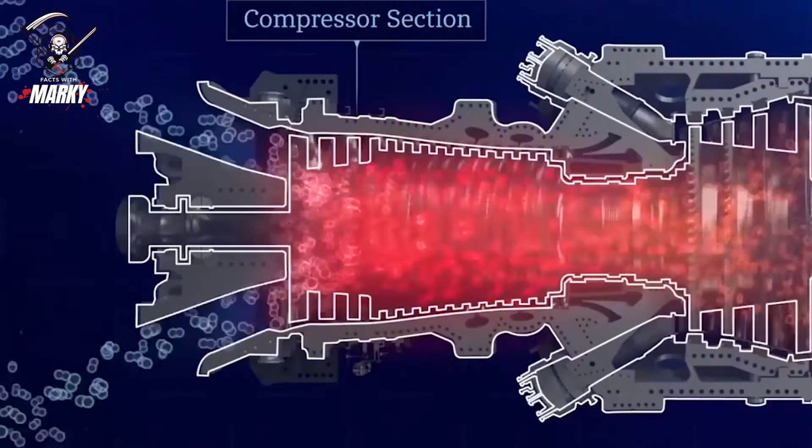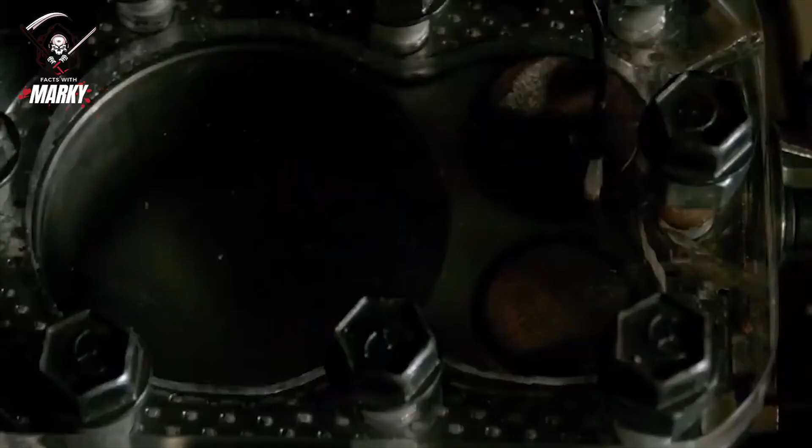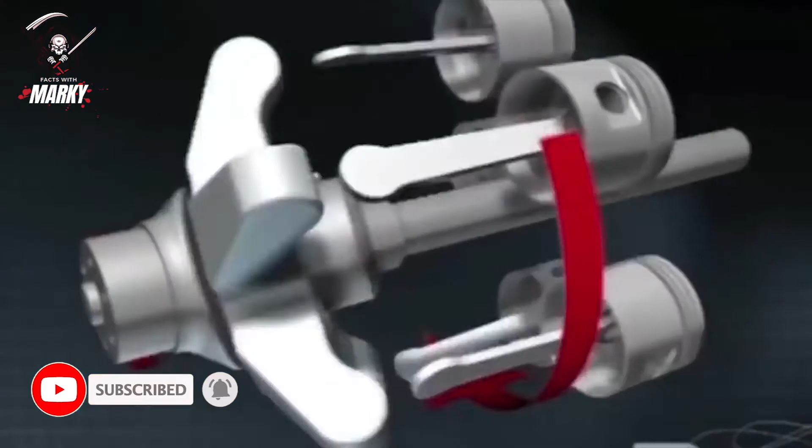Technology has come a long way since John Barber invented the world's first gas turbine back in 1791. Three years later, Thomas Mead refined Barber's idea and came up with the world's first gas engine. That same year, Robert Street introduced the concept of using liquid fuel, creating what we now recognize as the internal combustion engine. The same basic principles are still used in motor vehicles today, but amazing minds all over the world have introduced incredible ways of combining fuels and mechanical parts to bring us truly wondrous creations.

In this video, we're celebrating the strangest and most incredible engines in history.

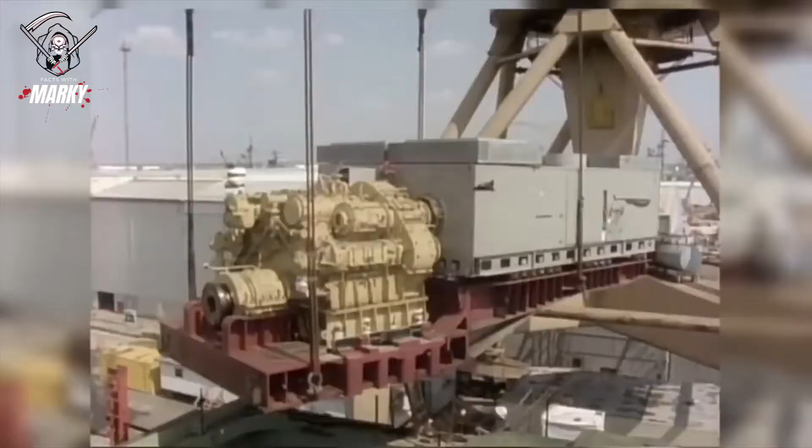The Zvezda M503 is a great place to start. This diesel engine was invented by the Soviet Army during the 1970s. You could originally find Zvezda M503 engines hard at work in the heart of Soviet missile boats, where they were laid in three at a time. The 7-bank, 42-cylinder radial engines were incredibly heavy, weighing in at almost 12,000 pounds.

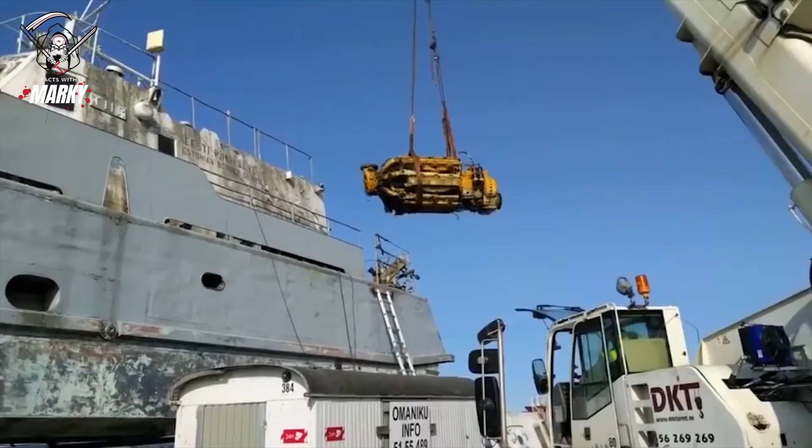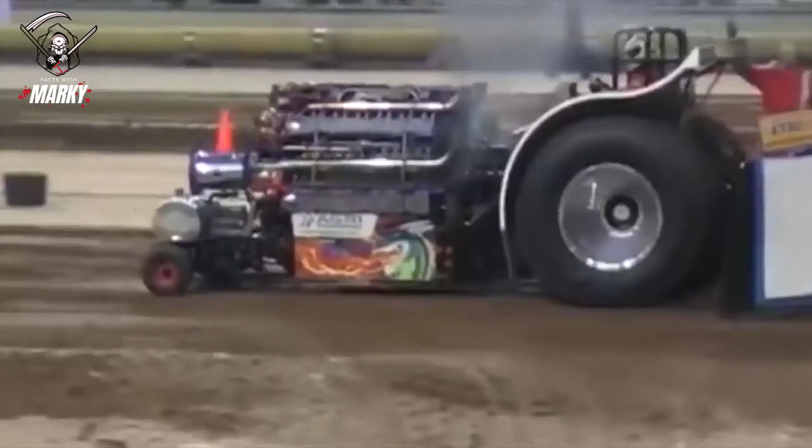Because they weighed so much and were difficult to transport, many believed they would only ever be used on the ground or at sea. A German drag racing team had other ideas. By adapting the engine and replacing the fuel with methanol, they got the weight down to just over 7,000 pounds. The engine is now used in their car, Dragonfire, which is capable of pulling over 4.5 tons.

When NASA designs an engine, you already know it's going to be a big deal. Their X3 engine is the biggest of all those big deals. The 500-pound X3 has to be maneuvered using a crane, and it is the latest working example of an ion drive, the space propulsion that was once just a science fiction idea.

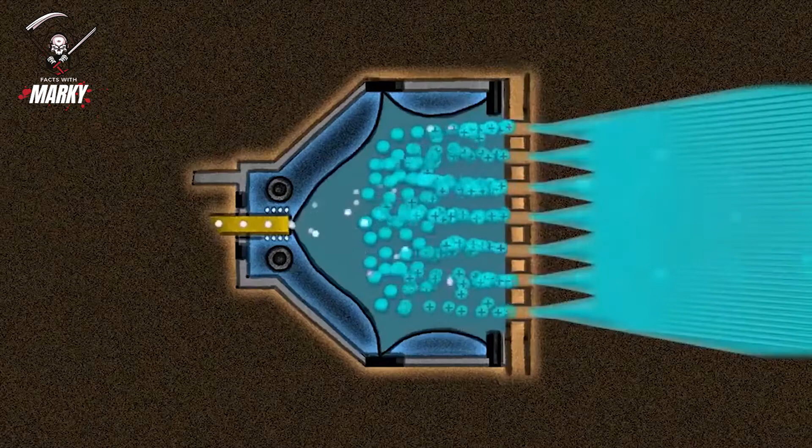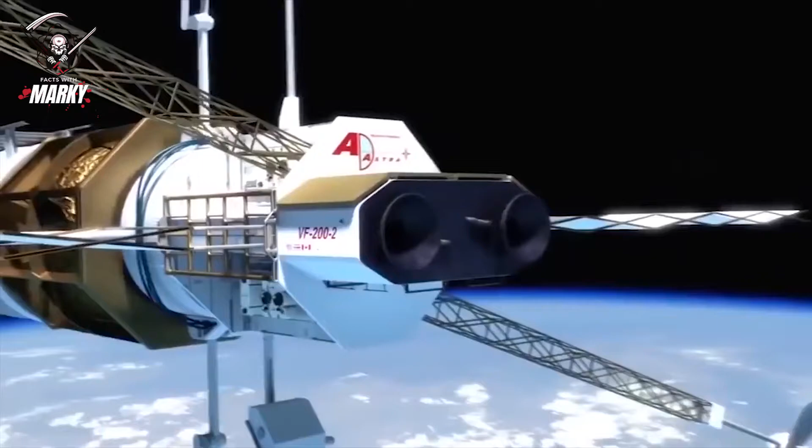Developed by NASA working hand in hand with the University of Michigan, the impressive machine has broken all major records during testing. It has a thrust of 5.4 newtons, which is the standard metric for measuring force. The previous record was only 3.3 newtons. It's also demonstrated record power output and operating currents. A ship built around the X3 engine would be capable of traveling more than 20 times faster than any aircraft ever built.

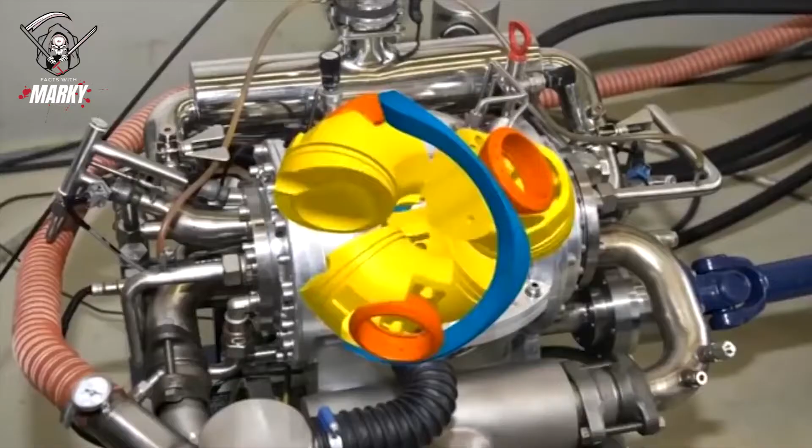Great ideas take time. In the case of Dr. Herbert Hüttlin's Kugel motor, it's taken over 20 years from the design stage to becoming a reality. Dr. Hüttlin's revolutionary spherical motor delivers all the power of a traditional combustion engine with less than a third of the moving parts and a quarter of the average weight.

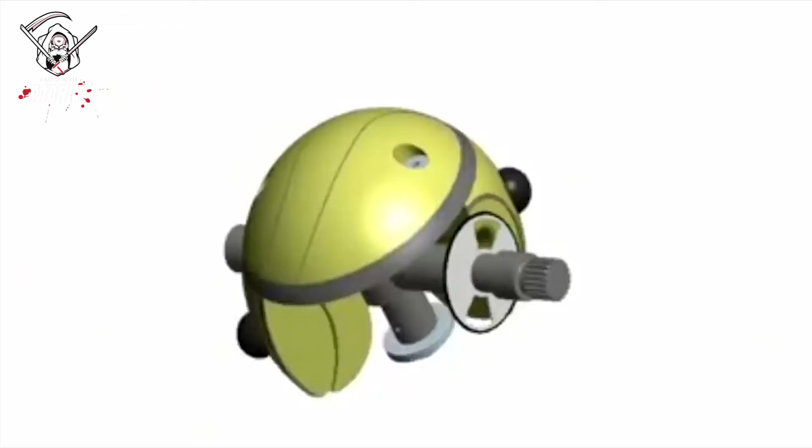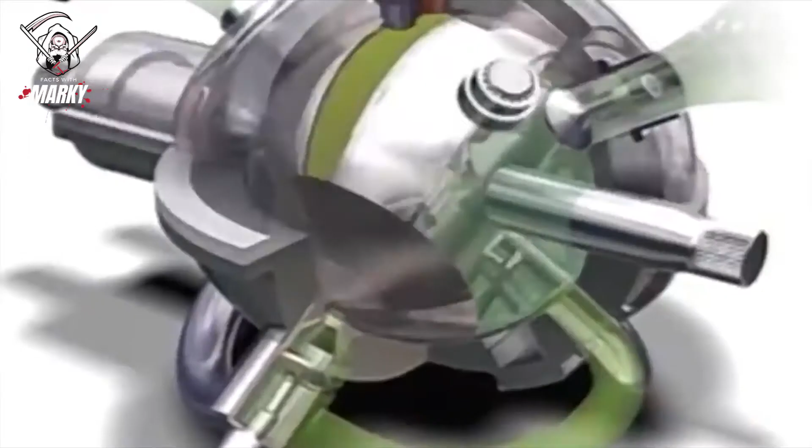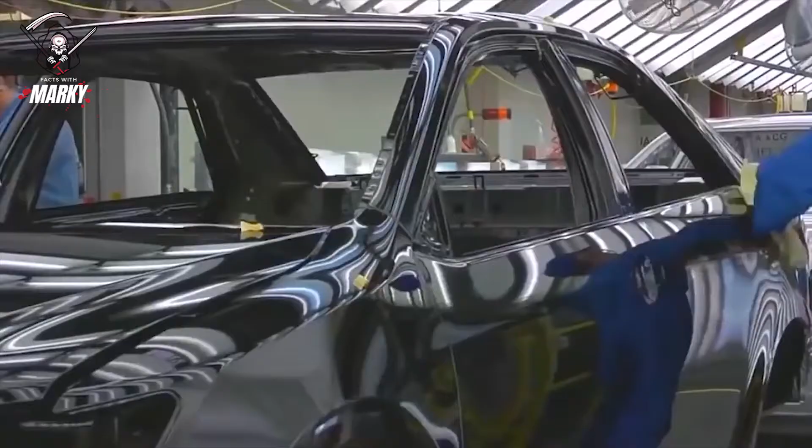At its heart, twin piston heads rock on an axis attached to large titanium ball bearings. Around the outside, an electromagnetic coil is affixed to a spinning magnet. As the engine spins, it generates 74 kilowatts of electricity, equivalent to 100 horsepower at 3,000 revolutions per minute. The genius scientist believes he can make it even more efficient with some minor adjustments, and hopes to have a major car manufacturer on board within the next year to build vehicles around it.

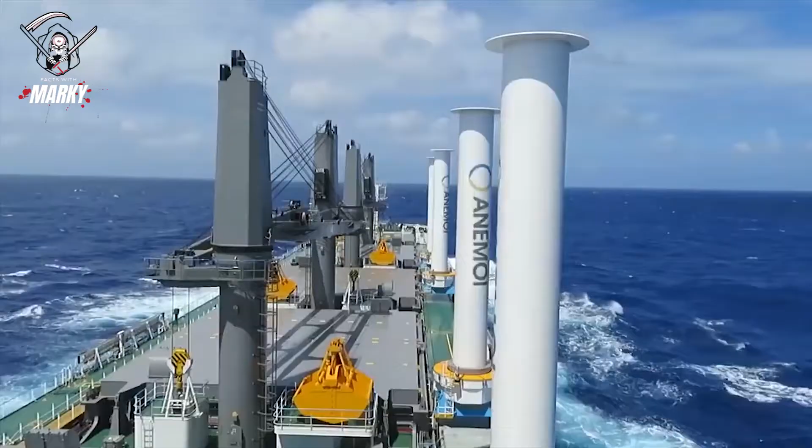It's not all about cars, though. How about a sailing ship that's powered by the wind but has no traditional sails? The concept of a turbo sail was tested all the way back in 1924 by German inventor Anton Flettner, but the increasing popularity of ships powered by engines made the idea seem redundant.

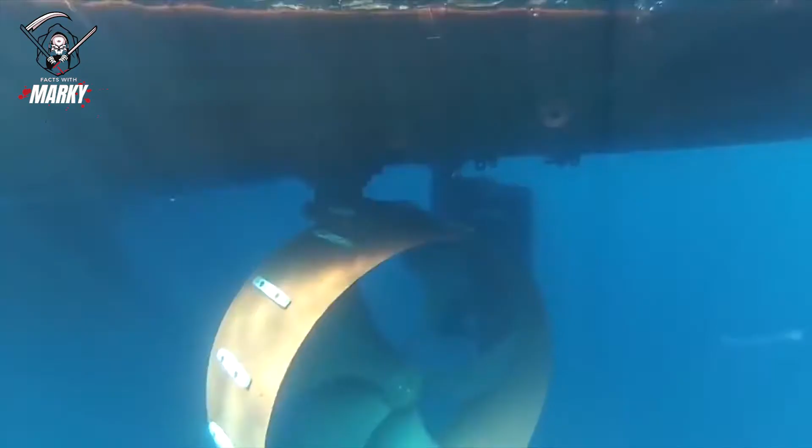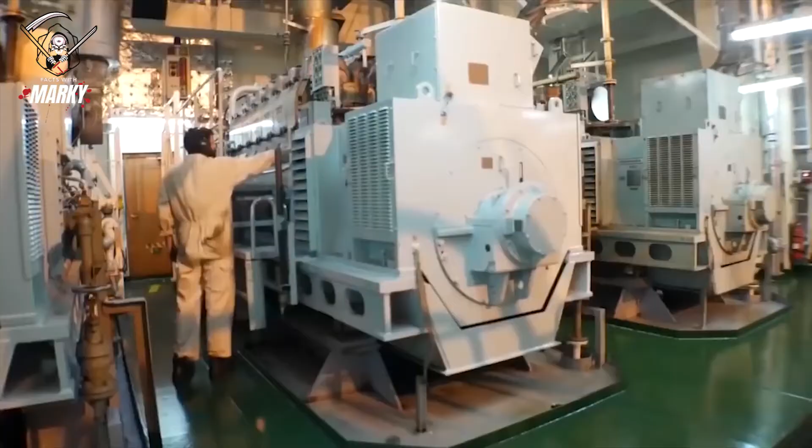French oceanographer Jacques Cousteau picked the idea back up in the 1980s and made it workable for the modern age. The principle is simple: tall circular sails rotate in the wind and work with a small engine to power the ship's propeller. Because the sails are narrow, they can generate power no matter which way the wind is blowing. Testing has proved that they're capable of generating up to 4 times more traction than the very best traditional sails, and require 35% less fuel than a traditional engine.

Cousteau built a ship called Alcyone to demonstrate the idea, and it caught the attention of many ship manufacturers. Oil company Shell has announced plans to build the world's first turbosail-powered oil tanker, which should be in operation by 2019.

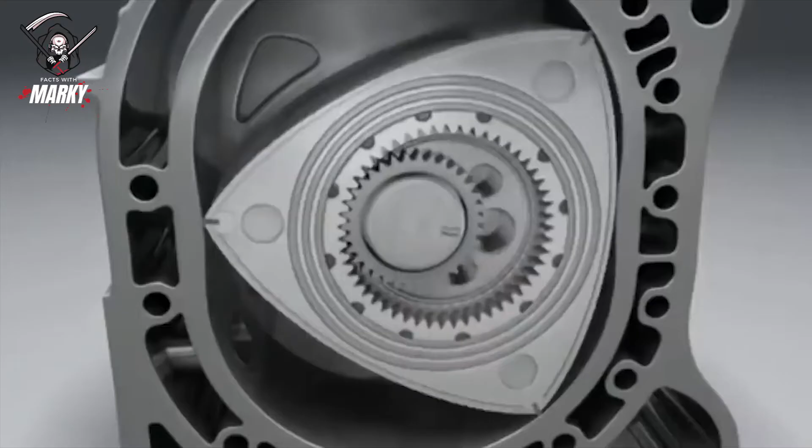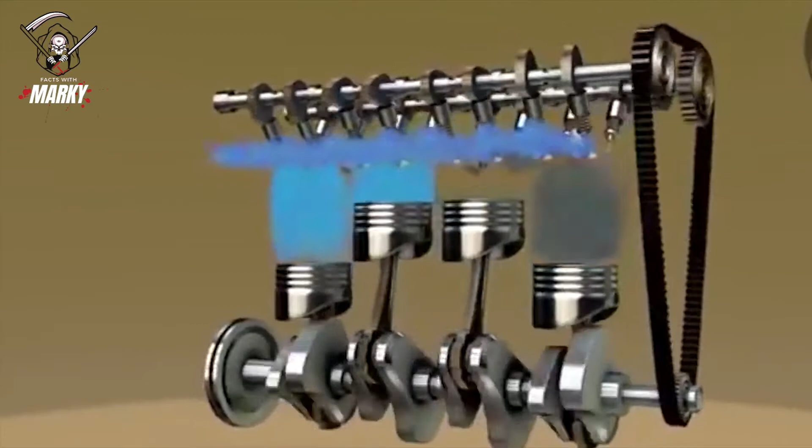Mazda have always been innovators when it comes to rotary engines. They've been trying to include them within their vehicles since the 1960s. Rotary engines do away with all the pistons you'd find in a normal combustion engine and replace them with rotors. The result is a lighter engine with a very high power-to-weight ratio, and the best example of their work so far is the Mazda Wankel engine.

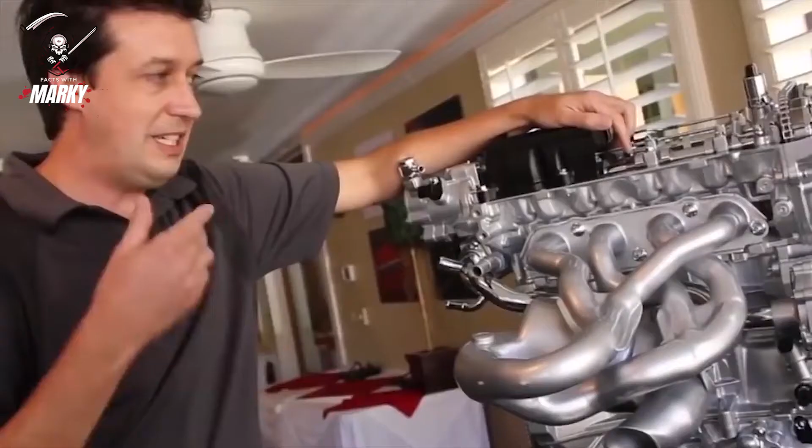Their poor fuel efficiency has made it difficult to create a regular road car featuring the Wankel engine, but the engine has found a home in light aircraft. There was even a single-seater racing class built around it, the Star Mazda Championship. Mazda are still working on improving the engine's fuel efficiency and hope to install it within a newly built car in the near future.

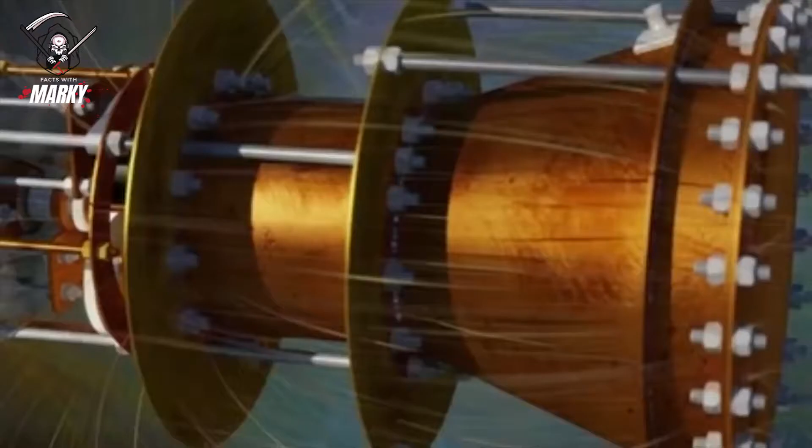The Chinese-built EM drive engine has been the subject of rumor and gossip in the technology world for years. The EM drive is a purely electromagnetic thruster. Inventors claim that it generates thrust by bouncing compressed microwaves around inside a sealed container, and therefore requires no propellant. Many people believe this to be completely impossible, because producing a reaction, in this case thrust, without the need for an initial action, like a propeller, breaks Newton's third law of motion.

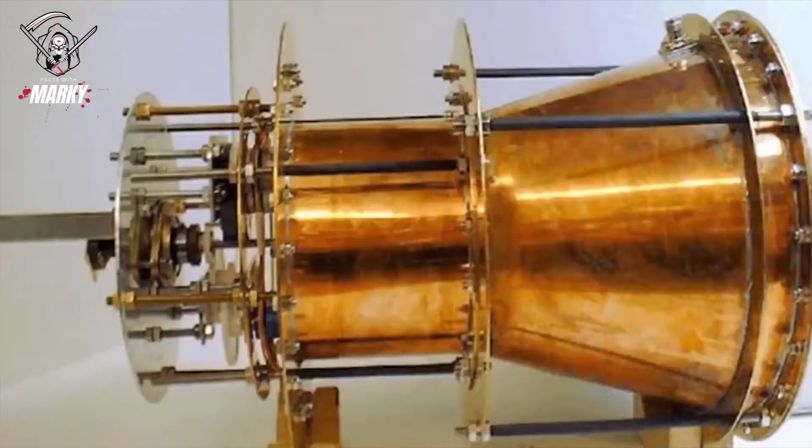A video released last year by Chinese sources seems to show a working prototype of the machine, but many scientists dismiss it as propaganda. However, if the Chinese really have created a working EM drive, it will change the world of propulsion as we know it.

The drive would be strong and fast enough to get a spaceship to Mars in around 70 days.

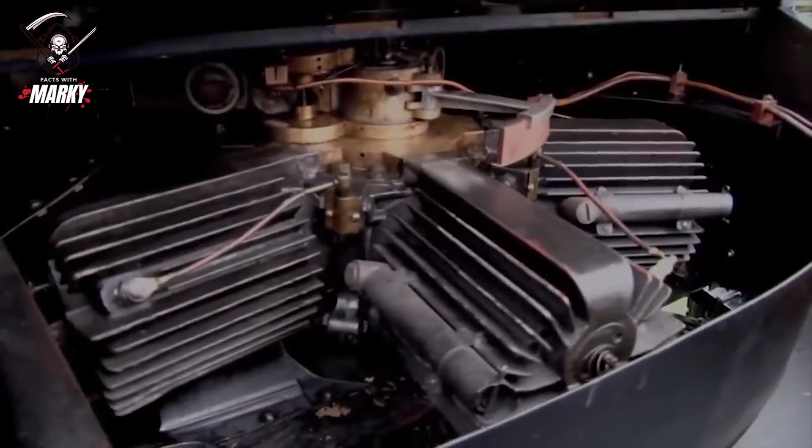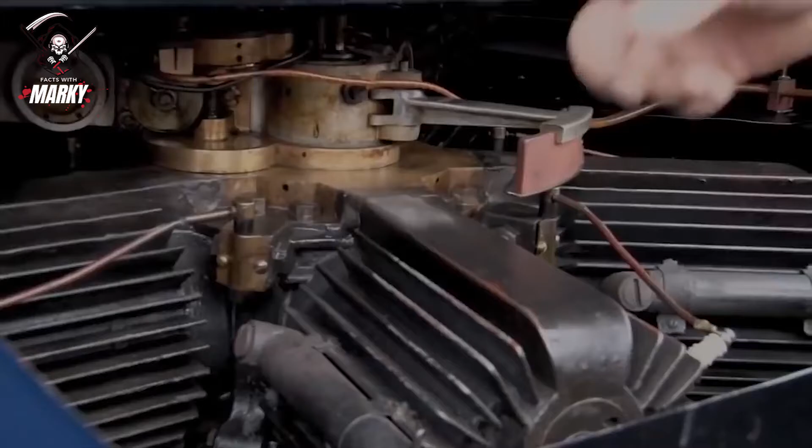The Adams-Farwell engine is truly one of a kind. Patented all the way back in 1896, it was fitted to a standard horse-drawn carriage and did away with the need for the horses. It's the earliest known example of a rotary engine running with 3 cylinders, and it was light years ahead of its time.

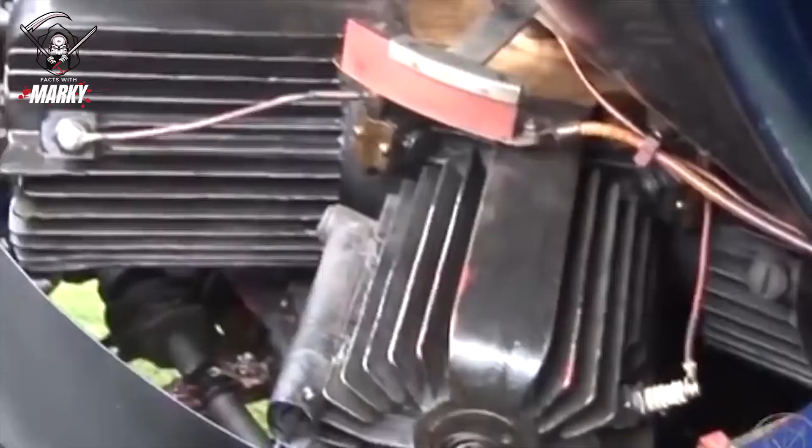It didn't even need a radiator, thanks to its incredible air-cooled design. The engine and the car that inventor Fay Farwell built around it was the star of the Chicago Auto Show in 1905. He must really have built these engines to last, because one working model still exists today at the National Automobile Museum in Reno, Nevada. Seeing it in working operation is an amazing sight. As Farwell himself used to say, 'It spins like a top.'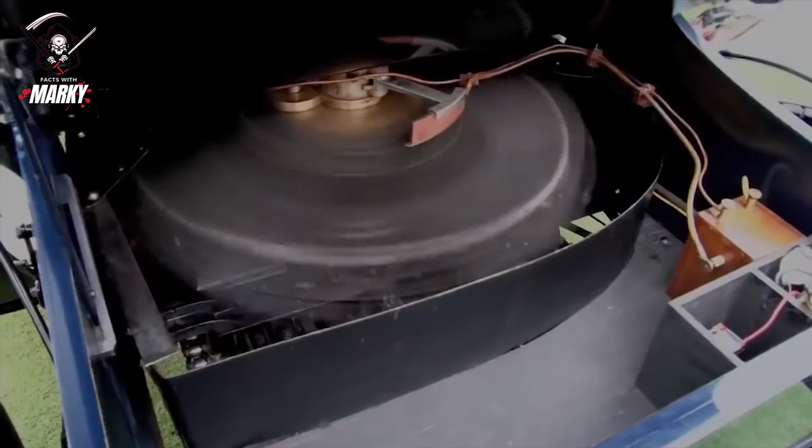Nanotechnology is the science of the future. Machines based on nanotechnology can be put to work inside our own bodies to seek out and repair damaged and diseased cells. Obviously, building a standard engine is no use when you're making machines this small.

So scientists got inventive and did something astonishing. They invented an engine that actually runs off DNA. DNA molecules are carriers. They can transport information from one cell to the next. Scientists at McMaster University have demonstrated that these molecules can actually be programmed to drive around the body. DNA structures can be converted into tiny wheels, with a chemical signal that can be transmitted to act as the stop and go instruction. The implications for medical science are endless, and may one day progress to replace surgery as the standard process for treating many illnesses.

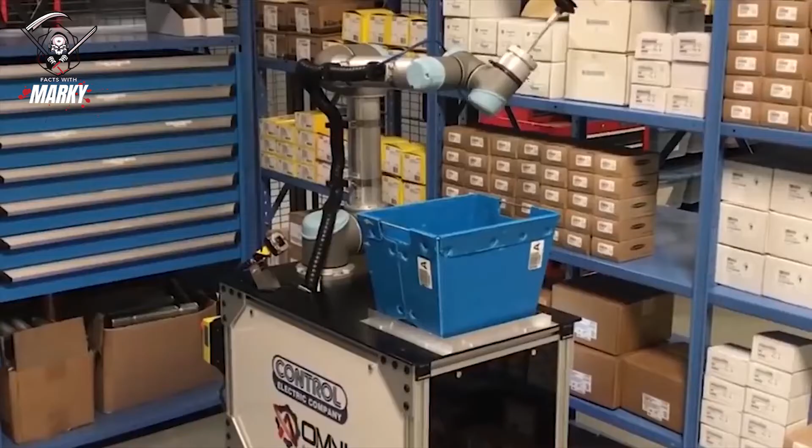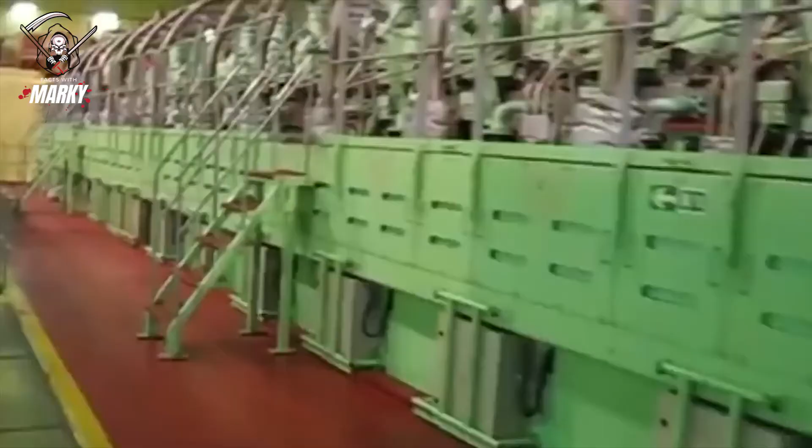Now we go from the very small to the truly gigantic. When you order goods from the other side of the world, someone has to transport those goods to you. A lot of them still come by sea, and scientists are still working on ways to cross the ocean faster than before. That's where the Emma Maersk comes in. It's the largest carrier ship in the entire world.

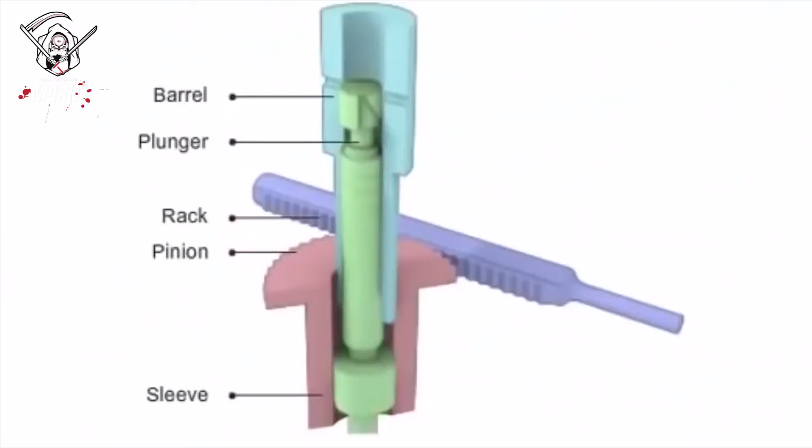And if you're going to build the world's largest carrier ship, you need the world's largest engine inside it. The Wärtsilä Sulzer engine is 44 feet tall, 90 feet long, and runs on diesel. Instead of all the standard parts you'd expect, camshafts, fuel pumps, and chain gear, it's actually built around technology usually found inside train engines. The engine produces 109,000 horsepower and can get from China to California 4 days faster than any other ship.

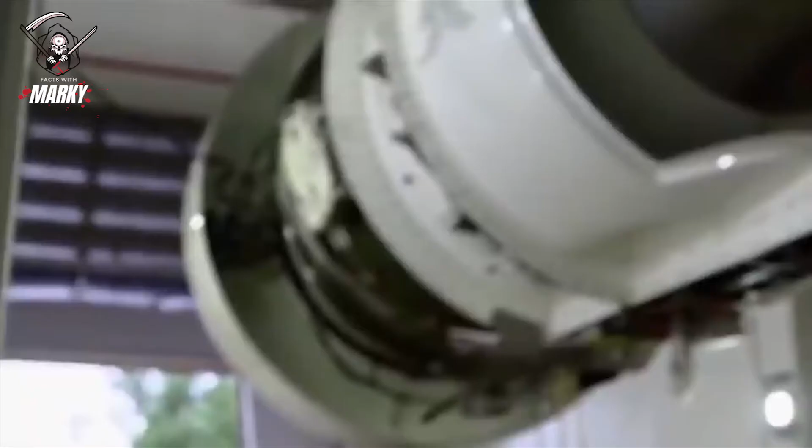When an engine is nicknamed the Shockwave, you can just tell it's going to be fast. That's the name given to the Pratt & Whitney J34-48 jet engine, which powers the fastest racing truck in the world. Taking technology from an airplane and shrinking it down so it fits inside a standard Chevy cab from 1957, the speed it can reach is almost beyond imagination.

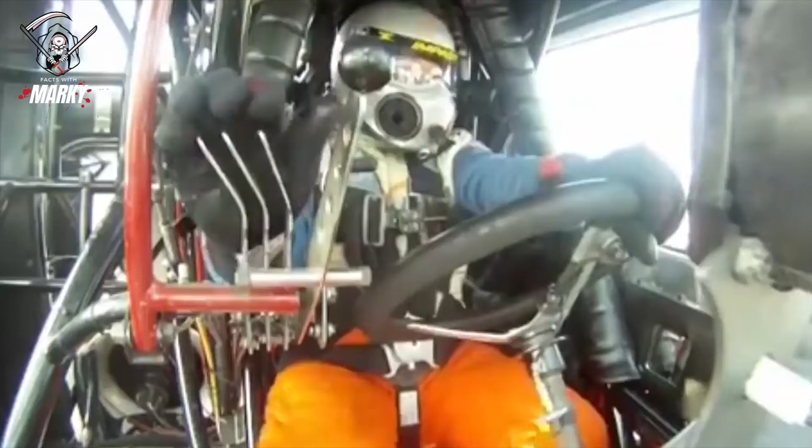It holds the world record for speed recorded by a truck, reaching 376 miles per hour. When it's at full acceleration, the Shockwave truck can travel a quarter of a mile in 6.36 seconds. Blink and you'll miss it.

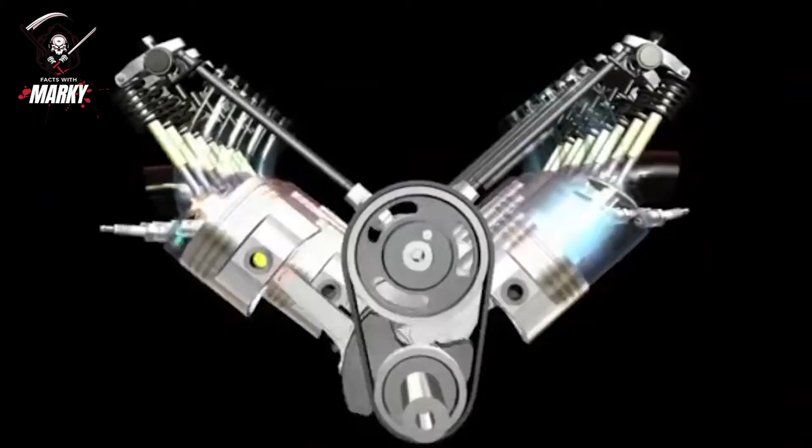As a bonus, how about an engine made entirely from paper? This scale model of the V8 engine is the work of genius inventor Alexei Zollner from Belarus. He took the design of the popular car engine and shrunk it down to the size of a ping pong ball. The tiny pistons are coated in a thin layer of alcohol to keep them moving.

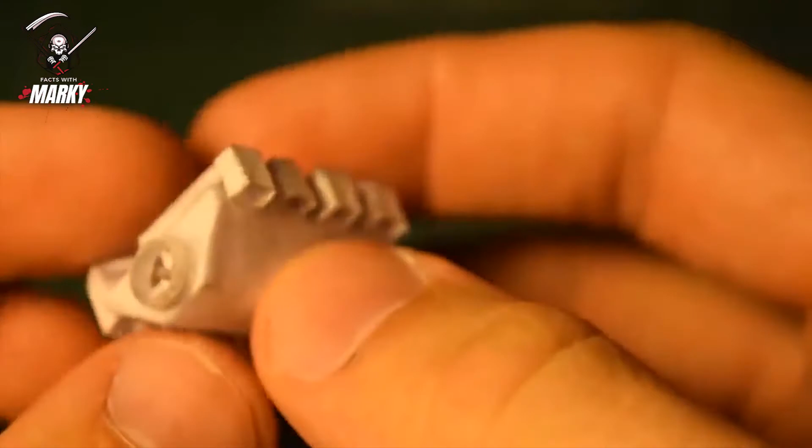And although you can crank it into life using your fingers, it's much more fun to watch it running on compressed air. We're sure you'll agree it's really beautiful.

If testing on a new type of plane engine in the UK is successful, journeys from London to Sydney in Australia may fall from their current 20-hour duration to a more manageable 4. That would mean you could go to the other side of the world and back again in less than half a day.

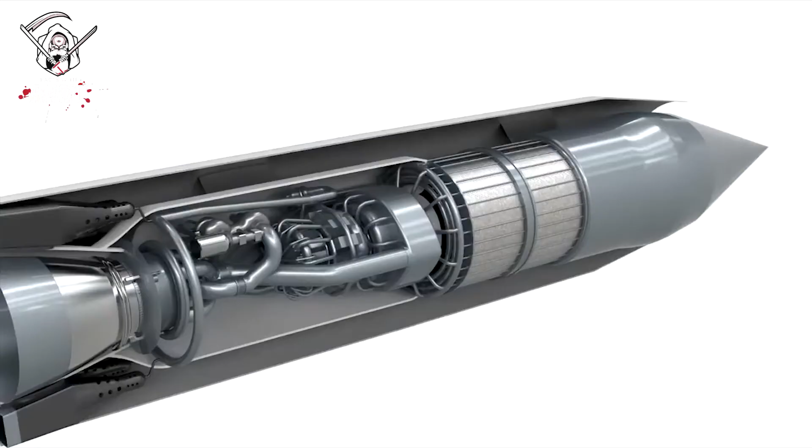The new technology is known as the Sabre engine, a hypersonic piece of machinery that's somewhere between a jet and a rocket. It could cut down on journey time by going all the way into space, reaching over 5 times the speed of sound, before powering up rocket mode to propel itself 5 times faster.

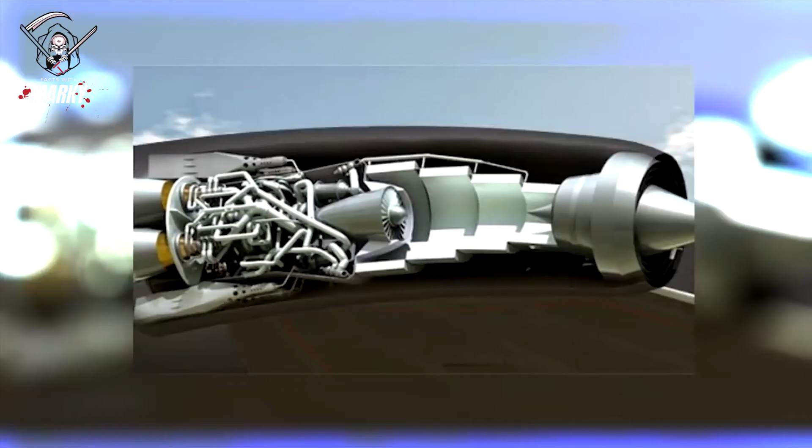Such acceleration generates extreme heat inside an engine, which up until now has been a barrier. But the Sabre engine contains a pre-cooling heat exchanger that can lower the temperature of incoming air streams by 1,000 degrees in less than 1/100th of a second. This is the cutting edge of thermodynamic technology.

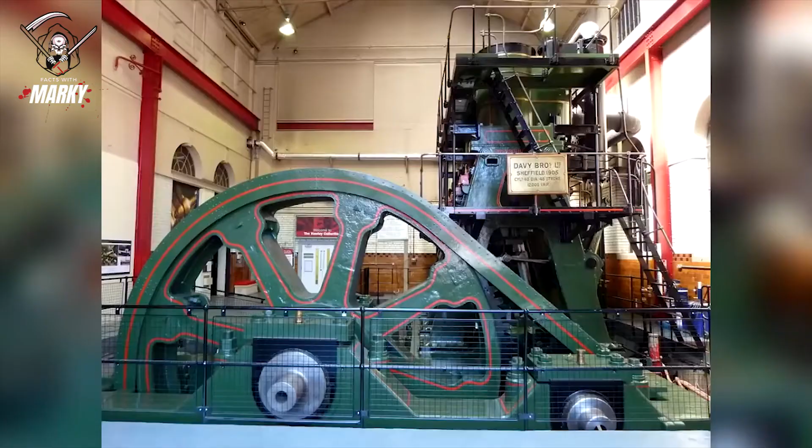The city of Sheffield in England is known for its steelworks, and the River Don engine may be the finest achievement in the proud city's history as a manufacturing base. The gigantic 3-cylinder steam engine was put together in 1905, capable of generating 12,000 horsepower with steam pressure of 160 pounds per square inch.

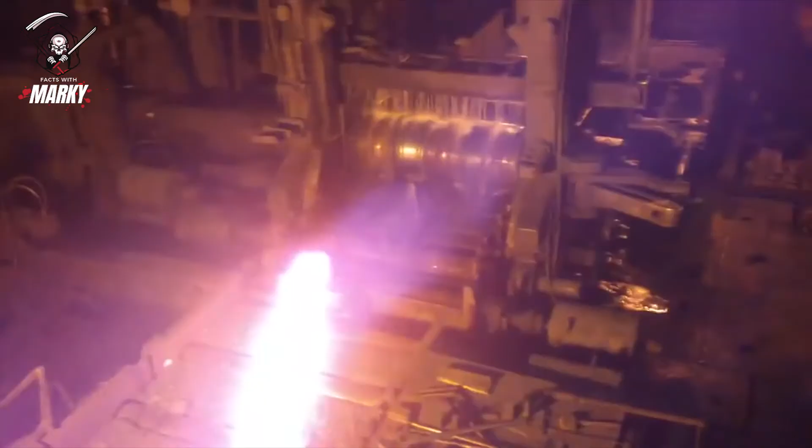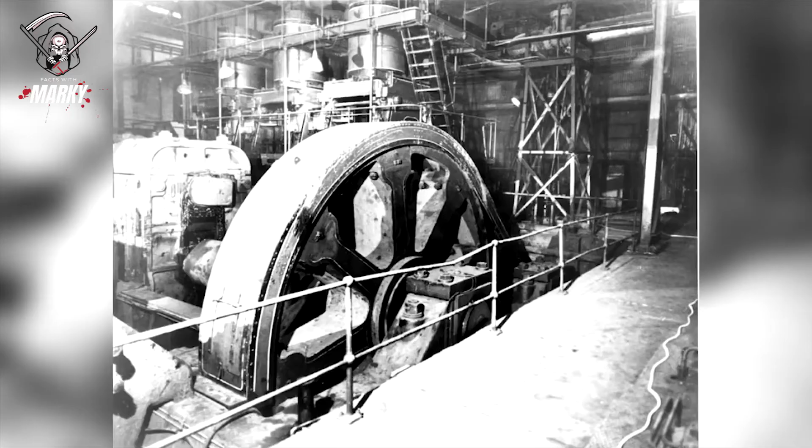It started out as the power behind a rolling mill within the city, but found a grander purpose as the engine room of the British war effort in 1914, creating armor plating for the country's fleet of dreadnought battleships. When war came again in 1939, the River Don was once again invaluable as a source of labor, this time rolling armor for the King George V battleship fleet.

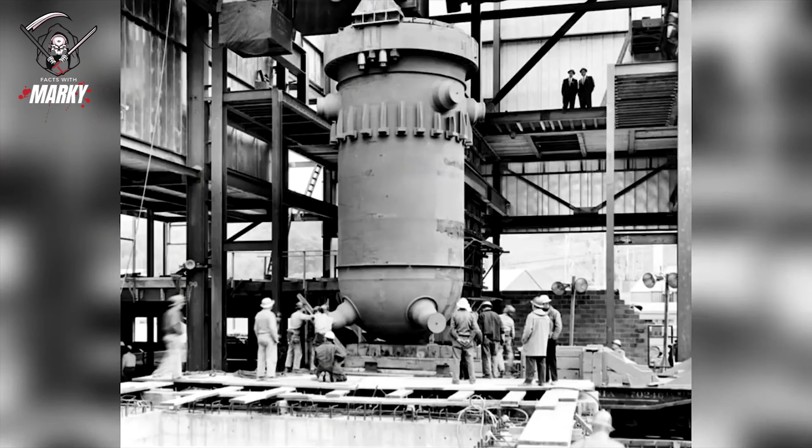During peacetime, the huge production capacity of the veteran engine saw it creating nuclear reactor shields for modern power stations before it finally retired from duty 73 years after the day it was first switched on. It's still spinning away in the Kelham Island Museum, thrilling visitors.